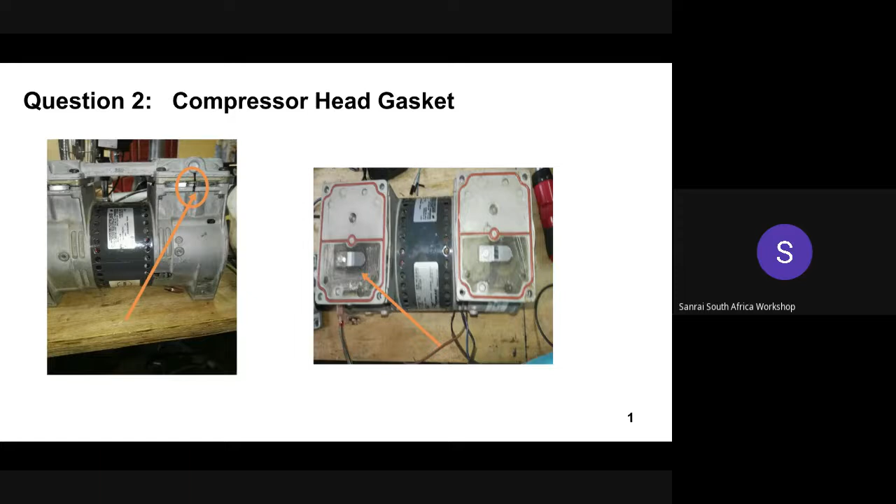Thank you very much, Paulina, for that explanation. I hope it was clear. If we have any further comments from the other technicians, you're welcome to add on to the explanation that you just gave us. And if we also have questions from the audience, you're also free to ask.

So we have a poll at the end of this question. Amapreet, if you would please launch that one up. Yes, Maui. The poll question is, have you ever faced reverse flow after doing a compressor rebuild?

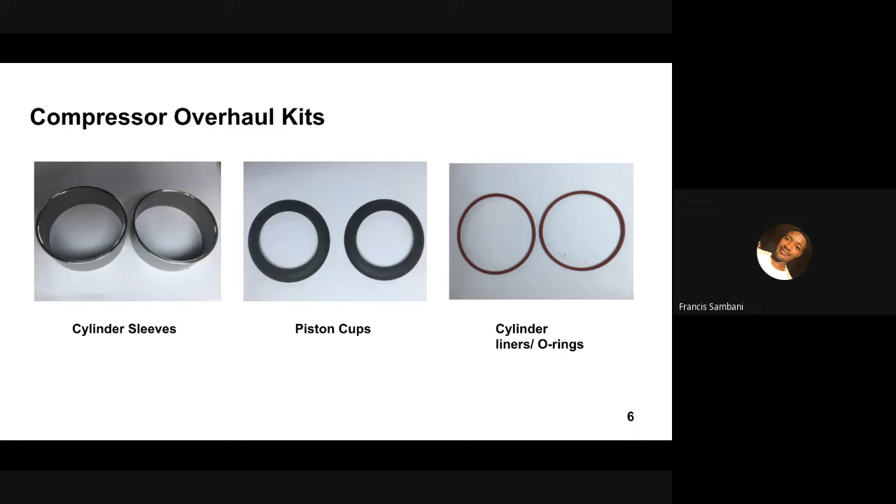So we'll start with the compressor overhaul kits. Compressor overhaul kits include the flapper or reed valves. You have the cylinder sleeves, the cups or piston cups, and then you have the gaskets and the cylinder liners, also known as the O-rings. As we can see on our graphics, we have the cylinder sleeves and then the piston cups, the cylinder liners or the O-rings. And on the next slide, we have the gaskets as well as the reed or flapper valves.

So over time, these components will wear out because of surface fatigue wear, among other factors. When these components wear out, the pressure produced by the compressor is reduced to a level below what is necessary for a concentrator to operate correctly. The most frequent of the 5 components mentioned above to wear out are the piston cups, as they are constantly wearing against the wall of the cylinder sleeves.

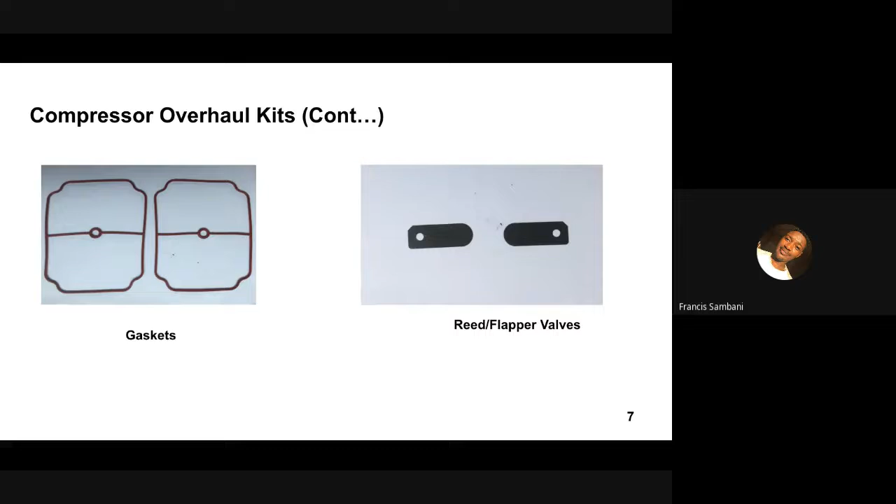So as we already said, the compressor wears out. When a compressor is manufactured, the manufacturer produces the maximum flow and pressure readings for that specific compressor. We have a wide variety of makes and models of compressors, each having different specifications. These specifications include the different sizes of the cylinder sleeves, piston cups, cylinder liners, gaskets, and other factors as well.

To this slide, sorry, the next one. We have the maximum flow and pressure readings of a compressor. For the Thomas 2450, the maximum flow is 3 cubic feet per minute or 84.9 liters per minute at a maximum pressure of 30 psi or 2.07 bar.

And then you have the Thomas 2650 or the Thomas 2660 with a maximum flow of 4.6 cubic feet per minute or 130 liters per minute and a maximum pressure of 45 psi or 3.1 bar. You can check the other models of compressors to appreciate their maximum flows and maximum pressures.

As I said earlier, when the overhaul kits wear out, the compressor will be unable to reach these flows and pressures given by the manufacturer. Replacing the overhaul kits is the solution when they wear out. However, at times one might only have unused or new overhaul kits of a certain model and have a worn-out compressor or worn-out overhaul kits of a different model.

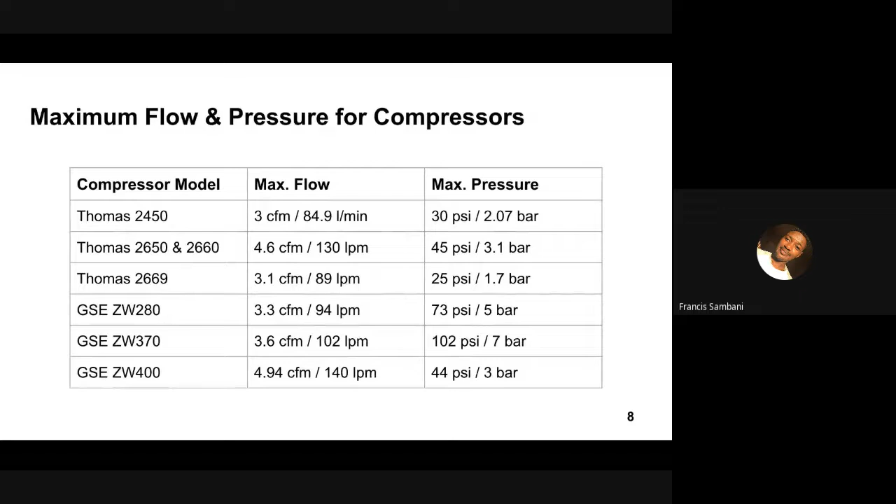In such cases, retrofitting with overhaul kits from the different model can work where the dimensions match or where they're slightly different. For some compressor models, direct retrofitting is possible. That is where the dimensions of the overhaul kits you want to replace match exactly, so you can directly retrofit, just taking the cylinder sleeve of that model and replacing it in the compressor you want to fix. For some overhaul kits, it is possible only with the addition or removal of spacers, and for other models it is impossible.

So there are some factors that you need to consider when you're trying to retrofit, and these factors are specific to the different overhaul kits. For example, the cylinder sleeves have different factors. So moving on to the cylinder sleeves, we'll consider the factors you should consider when trying to retrofit.

For the cylinder sleeves, you have the inner diameter. That's one factor you should consider. You also have the outer diameter of the cylinder sleeve itself, and the height of the cylinder sleeve, how high it is. You should also consider the piston stroke height, or how far up the piston goes when it is running.

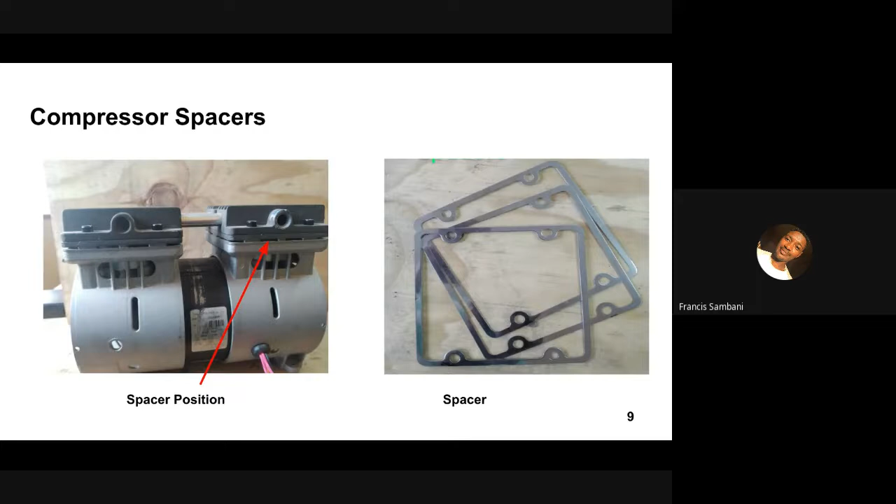So for this compressor, they're using 3 spacers, and 2 are of the same thickness and one is of a different thickness. One is a 1 mm thick spacer, and the other 2 are 0.3 millimeter thick spacers. So they were trying to compensate for a height of about 1.6 mm. So yeah, you can also do the same if you ever come across such a problem. So that is what you can consider on spacers.

Moving on to the piston cups. For the piston cups, what you have to consider is the inner diameter. So a larger diameter piston cap can be used on a cap retainer of a slightly lesser diameter. For example, you can use the ZW90 caps, which have an inner diameter of 48 millimeters, on a ZW140 compressor which requires caps of 47.2 millimeters inner diameter.

But then you can't use the caps of the ZW140 on the ZW90 because the inner diameter is less than that of the ZW90. So the piston cap won't fit on the cap retainer. So yeah, it won't be possible for you to do that.

But you can use a slightly larger diameter piston cap on a piston that requires a lesser diameter. In this case, you have to make sure that you tighten the cap retainer tightly to prevent any sideways movement of the cap when the compressor is operating. So just make sure you screw the screws in tightly enough.

So moving on to the cylinder liners or the O-rings. For the O-rings, what you need to consider is the thickness of the O-ring itself and the diameter. Those are the 2 factors you need to consider when replacing the liners. They have to match exactly in diameter, because the O-ring fits into a groove. If the diameter doesn't match, you won't be able to fit it in. And also the thickness: if it's too thick, it won't fit in the groove provided by the valve plate. So that's for the O-rings.

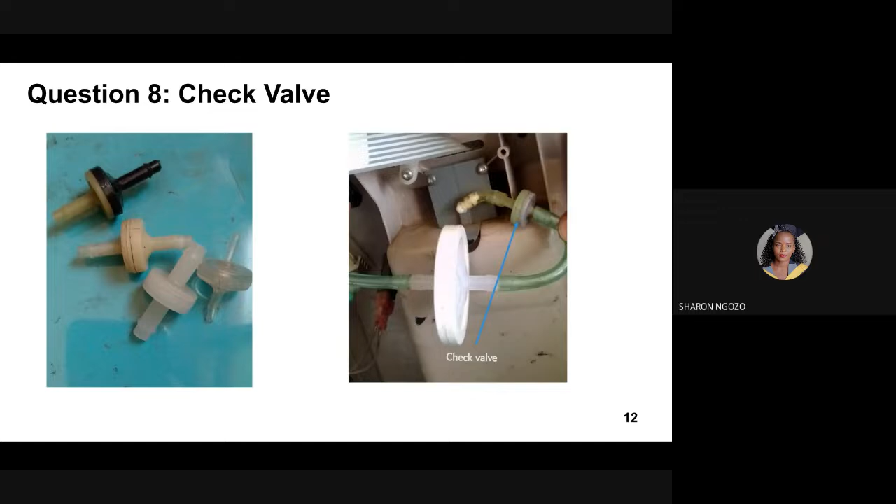Thank you very much, Sharon, for that explanation. If we have any questions for Sharon, please raise your hand and we'll help each other. And if other technicians have additional comments, you're welcome to add on to her explanation. All right, it seems we do not have questions. So moving on to our next question.

Our next question says, I am a biomedical technician at a district hospital. We received a donation of 15 oxygen concentrators. We plan on keeping these concentrators in a storeroom until they are needed, since we already have concentrators available in all the wards. Are there recommendations on the appropriate storage conditions for concentrators? So I will ask Paulina to take this one up. Thank you, Mwabi.

Oxygen concentrators are mostly affected by dust, humidity, and temperature in storerooms. Accumulation of dust in the gross particle and inlet filters, muffler, and concentrator tubing can lead to blockages. Dust in the tubing also renders the air from the concentrator unsafe for the patient, even though it is rich in oxygen. This can cause bacterial infections, which can endanger the patient's life.

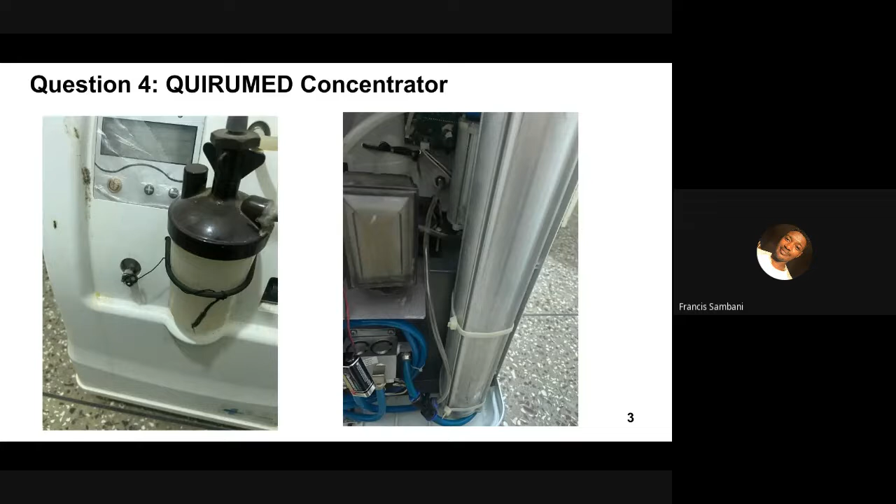Thank you very much, Francis, for that explanation. I hope that helped to answer all the issues that she had. But Abena, if you get to review this video, you can always contact us through our email, so that if you still have any further issues, then we can help each other to sort them out.

All right, so moving on with our questions now. So this also happens to be our final question of the day. So the question says, I am a technician at a health center. While conducting oxygen concentrator assessment in the wards, I came across a 515 DeVilbiss-based concentrator that when I tested the purity with the oxygen analyzer, the purity was low.

I noted the compressor kits were worn out, and after opening it at the maintenance workshop, after checking the Hobbs meter, it showed that the machine has run for longer hours than shown in the manual and needs to be serviced. But to my surprise, the concentrator's service LED was not illuminating, and the buzzer was not beeping, and nurses were still using it since there was no sign of malfunction of the machine. What could be the problem, and how can I solve this problem? So I'll ask George to take this one up.

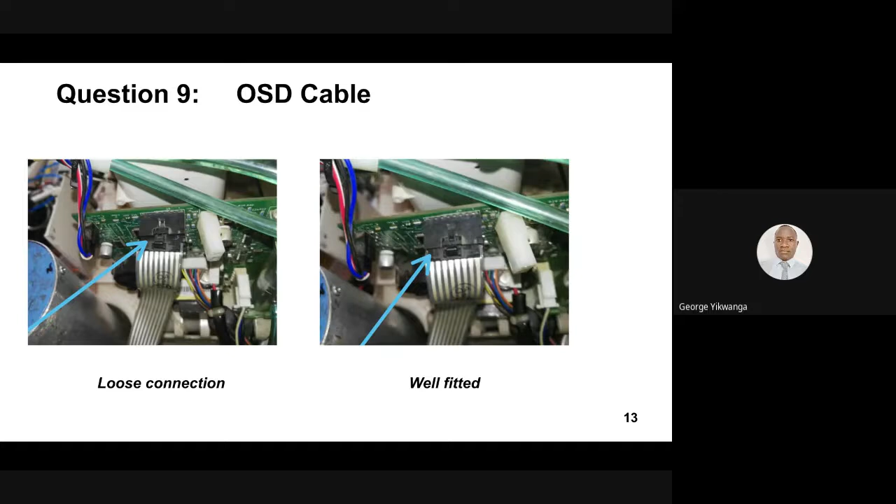Thank you very much, George, for that explanation. If we have any questions or comments from the audience, you are welcome to raise your hand and ask, and George will do his best to answer the questions. If you also have some further comments from the other technicians, you are also free to add on to what George has just given us. All right, so it seems we do not have any further questions or comments.